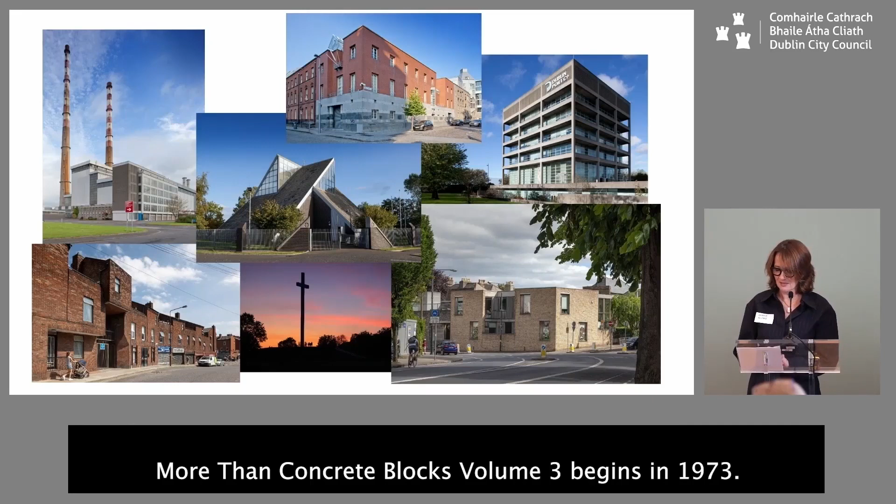More Than Concrete Blocks, Volume 3, begins in 1973. The book starts with three contextual essays, one for each of the decades, the 70s, 80s, and 90s, before setting the scene and allowing the reader to situate themselves in the city and imagine the conditions that gave birth to a wonderful, eclectic, and particularly Irish architecture.

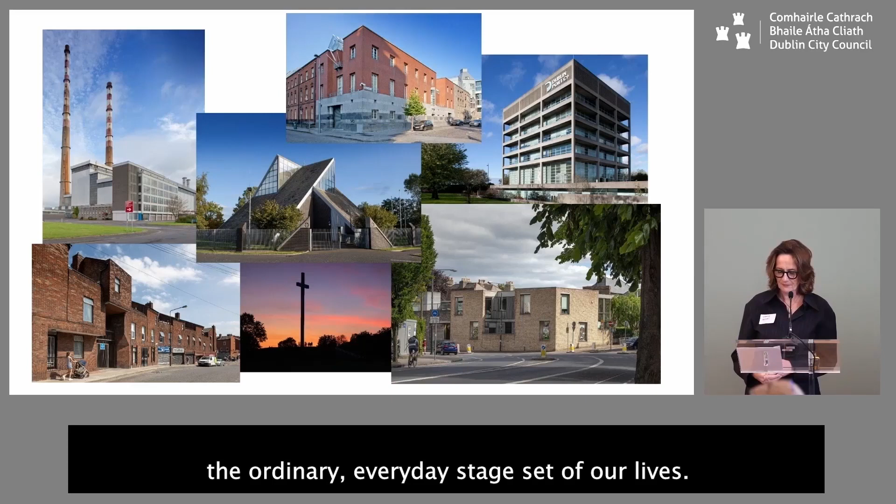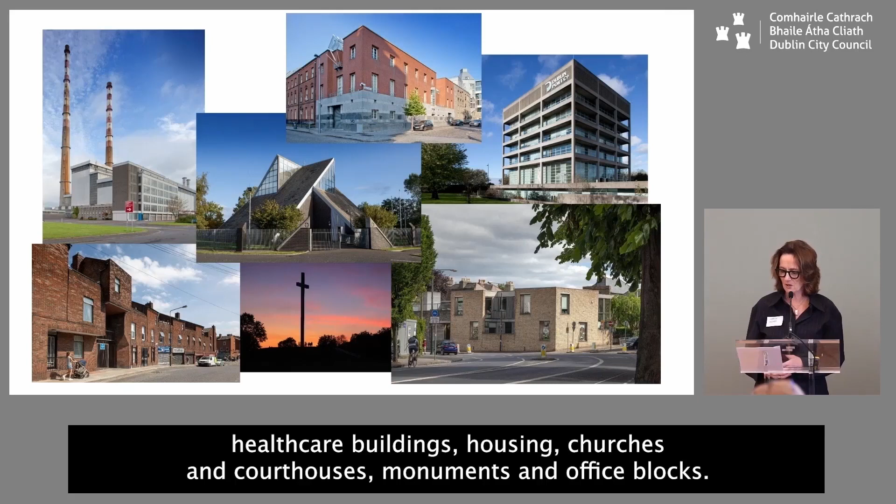That is the bread and butter of our city, the ordinary, everyday stage set of our lives. More Than Concrete Blocks tells the story of myriad building types: power stations, schools, healthcare buildings, housing, churches and courthouses, monuments and office blocks. It tells the story of why those buildings are the way they are, why they were built and by whom.

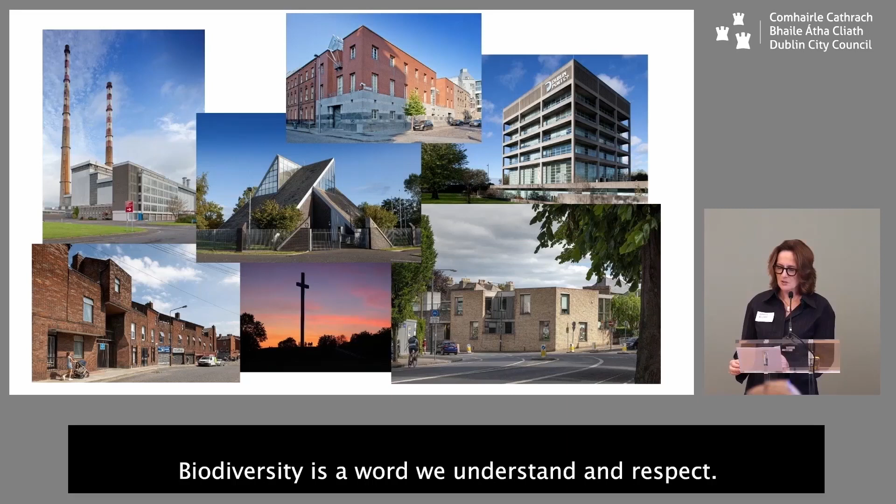And how they have served their owners and their communities in the years since they were built. A fundamental principle behind the More Than Concrete Blocks project was the belief that knowing our building stock well, understanding its intricacies, and valuing it for what it tells us about ourselves is vital for a healthy and thriving city. Biodiversity is a word we understand and respect. We believe that cities need similar diversity, archidiversity, if you will, to remain healthy, vibrant, relevant, and sustainable.

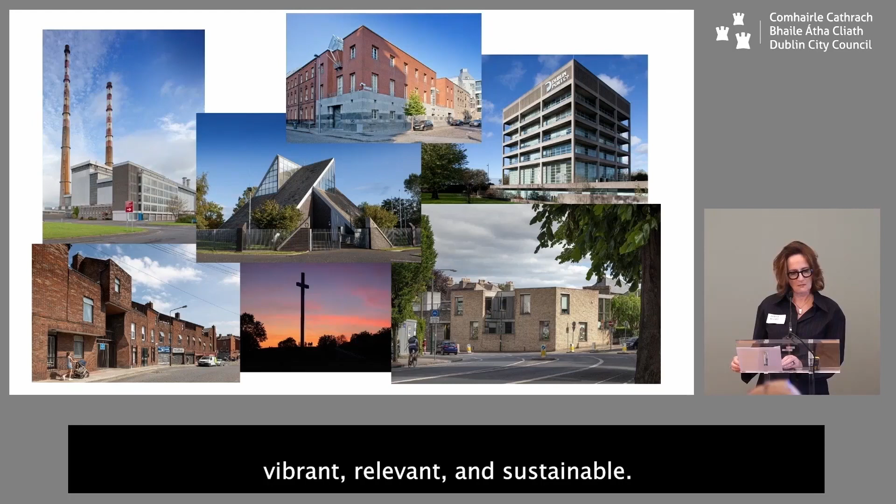We need to pause and consider the loss of our archidiversity, particularly the significant loss of late 20th century office blocks, and imagine how our city can embrace that architecture and take it on the ride into the future.

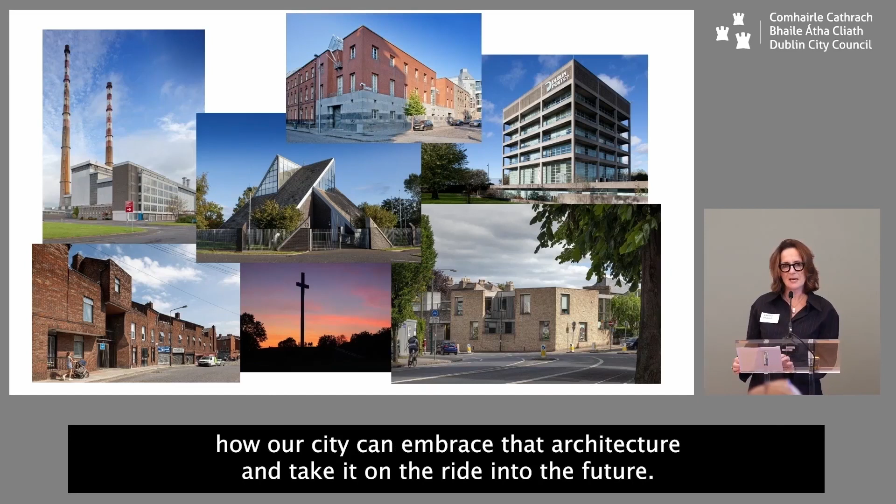In recent times, my regular cycling route has changed profoundly with the loss of three significant 20th century Dublin landmarks: Kevin Street College of Technology, Molyneux House, and River House. Ample evidence of the increasing incidence of loss of this particular 20th century varietal.

Indeed, the 60s and 70s office block is a particularly vulnerable beast, with wholesale demolition occurring across the city. The scale of obliteration is feeding the debate about architectural value. What makes a building worth conserving or worthy of substantial retention by way of adaptive reuse?

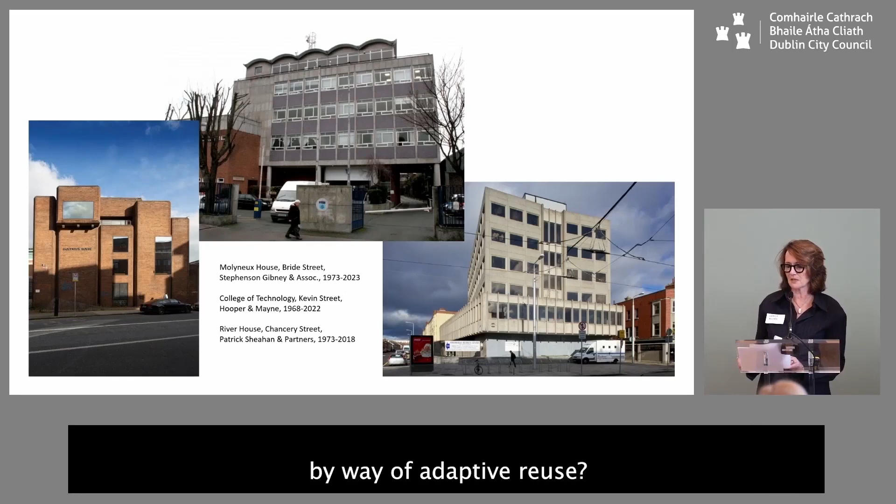Under planning legislation, local authorities are obliged to draw up a record of protected structures known as the RPS, which includes every structure which, in its opinion, is of special architectural, historical, archaeological, artistic, cultural, scientific, social, or technical interest. And I know everybody in this room is very familiar with that.

However, it is very rare to find late 20th century office blocks on the RPS. This factor, combined with the fact that 60s and 70s office blocks usually sit on very valuable city real estate, makes them particularly vulnerable to demolition.

There is no roadmap for the assessment of their value, and in any case, such assessment, if it is deemed necessary, falls to independent heritage specialists who earn their fees from the developers whose primary objective, of course, is to derive maximum value from the building site. It makes sense then that the sites of the 70s office blocks are primary targets for redevelopment.

Nevertheless, there are a few 1970s office buildings listed on the RPS, the former Bank of Ireland headquarters on Baggot Street, now known as Miesian Plaza, being one. Its recent refurbishment by its original architect, Scott Tallon Walker, is an obvious exemplar to boost the position of planning authorities regarding refusing permission to demolish in favour of refurbishment.

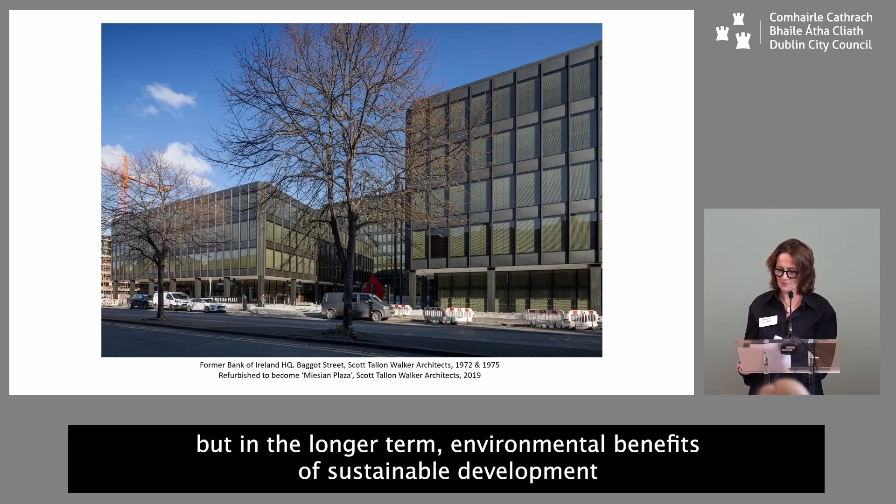The successful, albeit costly, refurbishment at Baggot Street can show the way for developers to see the value in such upgrades. Gains must be measured not just in terms of financial return, but in the longer-term environmental benefits of sustainable development and, of course, the preservation of our archidiversity.

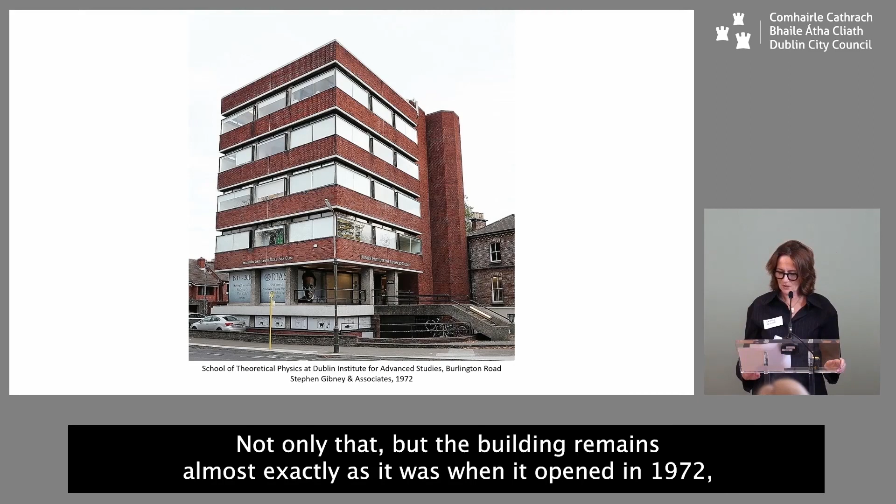Another lesser-known office building on the RPS is the School of Theoretical Physics at the Dublin Institute for Advanced Studies on Burlington Road, designed by Stephen Gibney and Associates. Despite many lucrative offers from developers to purchase the site, the DIAS, who is the owner-occupier, has held firm. Not only that, but the building remains almost exactly as it was when it opened in 1972, complete with original furniture, library shelves, light fittings, and the most precious fixtures of all, the blackboards.

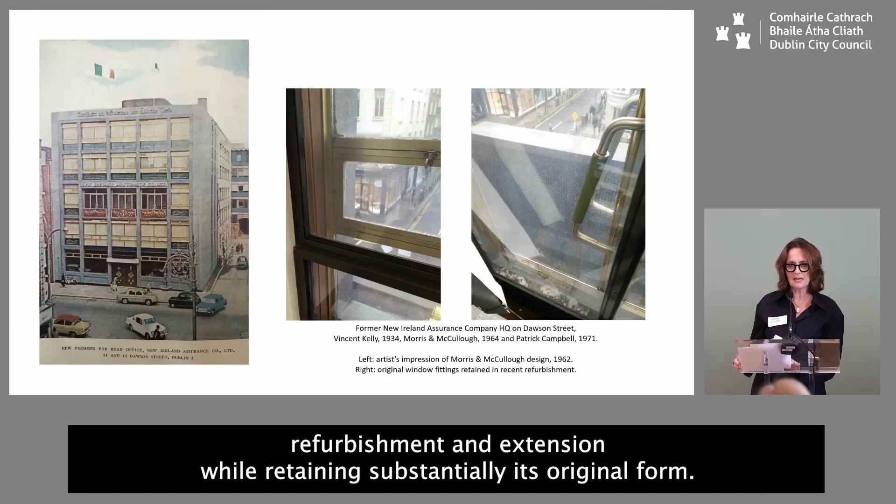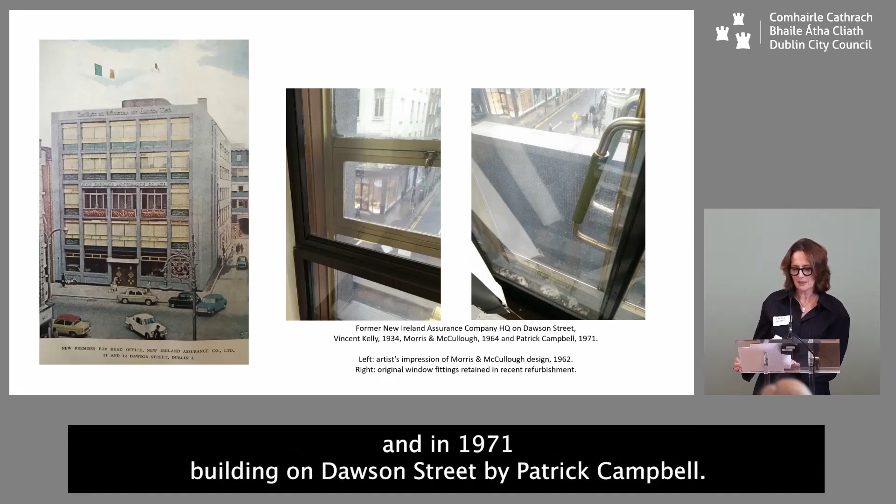The former New Ireland Assurance Company offices on Dawson Street is another example of an office building on the RPS, which is currently undergoing refurbishment and extension while retaining substantially its original form. The building is in fact an amalgam of three buildings: a 1934 office building on Dawson Lane by Vincent Kelly, a 1964 office building on the corner of Dawson Street and Dawson Lane by Morris and McCullough, and a 1971 building on Dawson Street by Patrick Campbell.

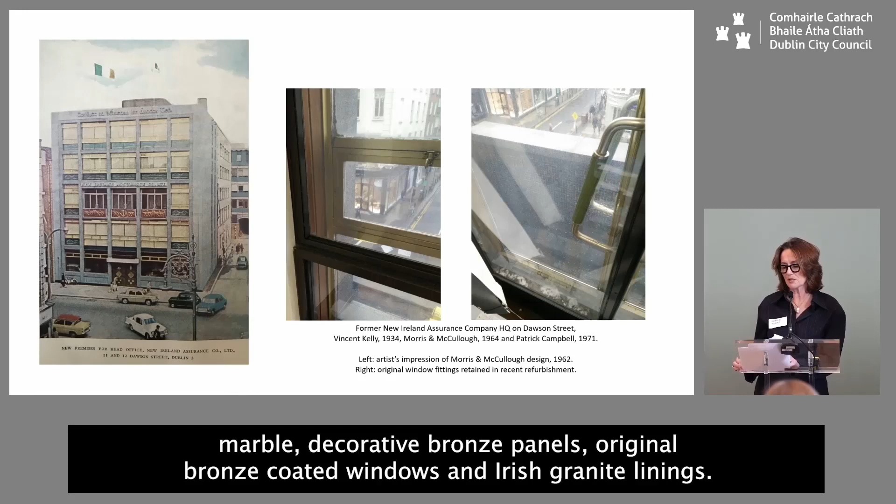The current refurbishment works, which are nearing completion, include the retention of the concrete structure and facades, and the original curtain walling system on the '71 building. They also include many of the building's unique and important details, including Connemara marble, decorative bronze panels, original bronze-coated windows, and Irish granite linings. Planners granted permission for additional floors set back behind the parapet, showing compromise can reap benefits for all.

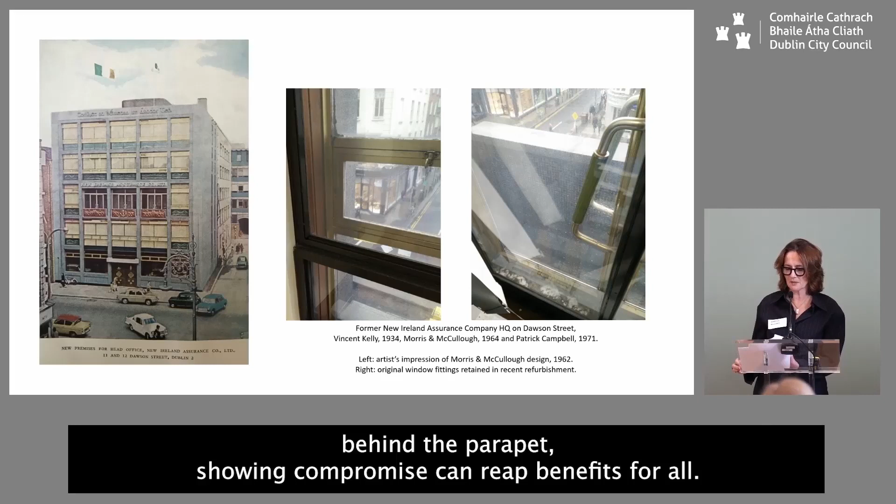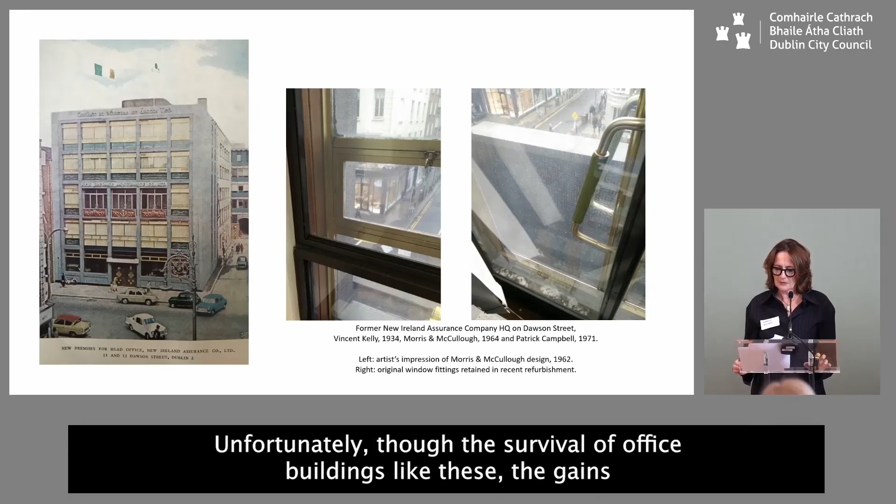In the context of the pervasive threat to Dublin's 1970s office blocks, these three projects represent gains, each in a different way. Unfortunately, though, the survival of office buildings like these, the gains, are greatly outnumbered by the losses.

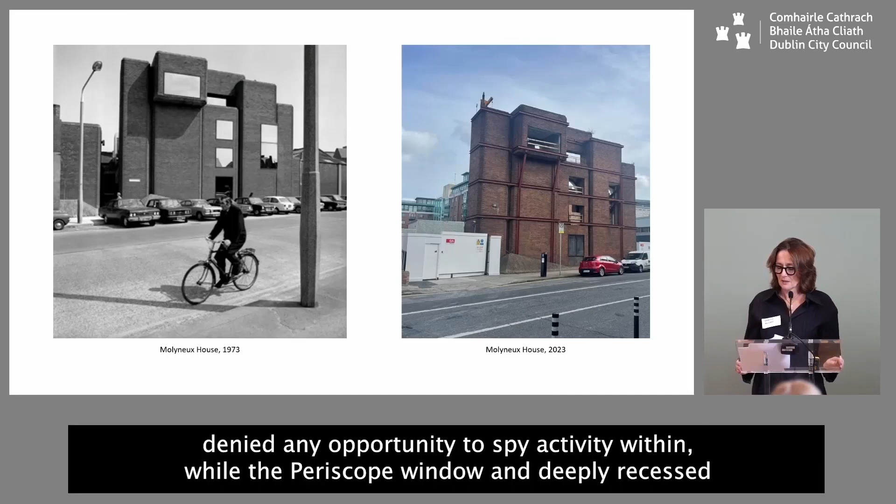Until earlier this year, the facade of Molyneux House remained one of the most distinctive in the city. The building's unusual fortress-like form was both perturbing and intriguing. Reflective glass in the windows, now gone, denied any opportunity to spy activity within, while the periscope window and deeply recessed balcony on the fourth floor suggested covert surveillance of the street below.

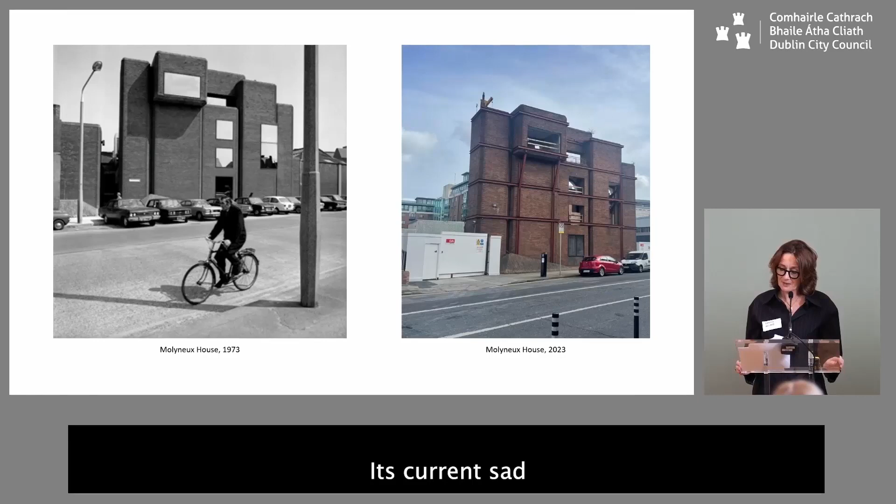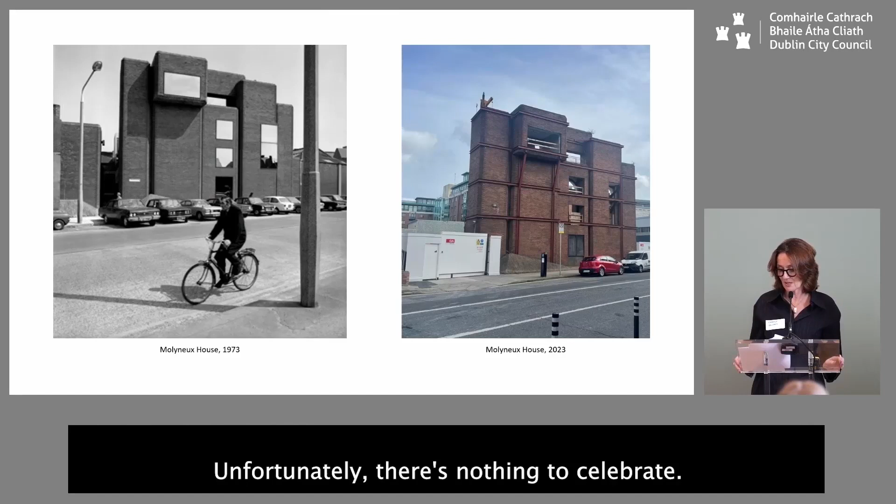In its current sad state, it is all the more distressing for the fact that Molyneux House is celebrating its 50th birthday this year. Unfortunately, there's nothing to celebrate. All that remains is the skeletal outer layer of its remarkable facade.

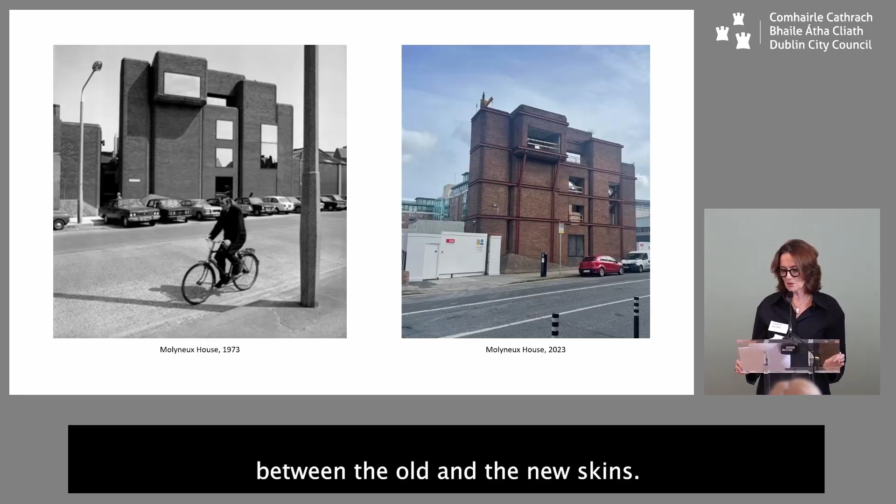In designing that facade, Stephenson purposely retained the front wall of the original 19th century Molyneux Chapel, constructing an outer layer that broke forward from the old in an irregular manner, so that a series of uniquely different spaces was created between the old and the new skins. By retaining the outer brick layer only, now in 2023, Stephenson's ingenious gesture is completely lost. A tragic irony, considering he was one of the most vociferous opponents of facadism in the 1970s and 80s.

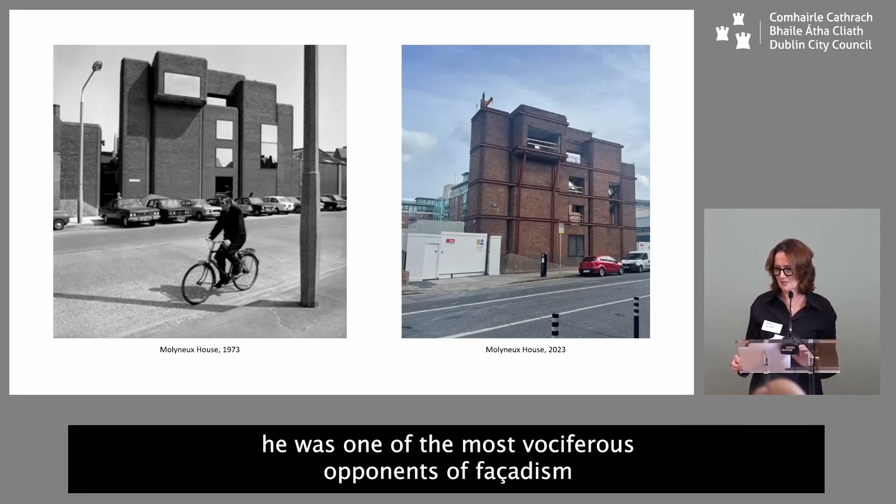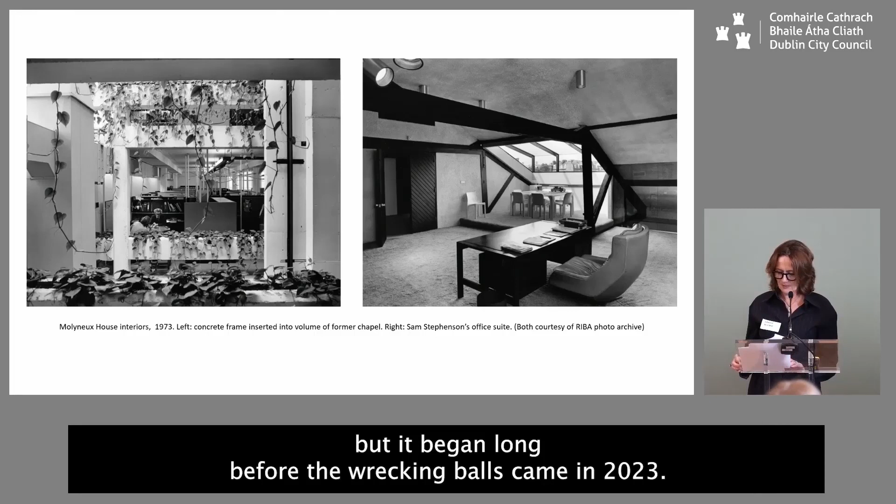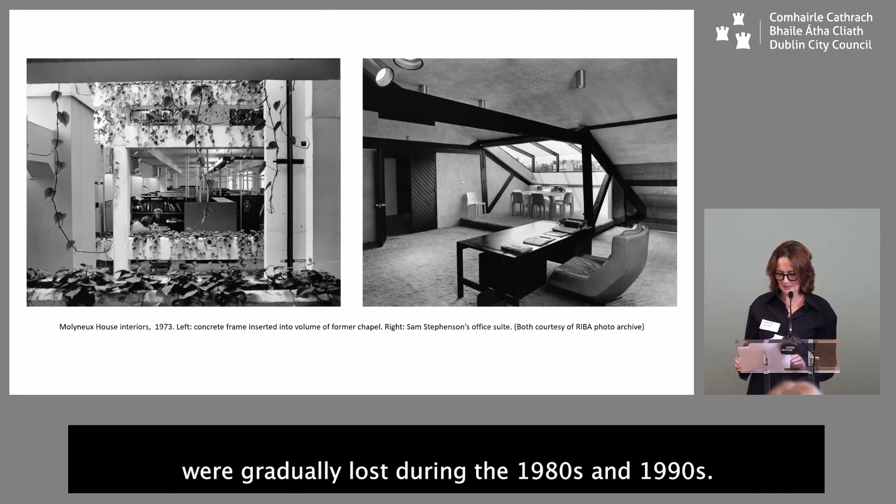What has been lost at Molyneux House is significant and regrettable, but it began long before the wrecking balls came in 2023. Stephenson's avant-garde 1970s interiors, a gleaming white concrete frame inserted into the volume of the former church, with open-plan offices, a glass lift, an open staircase, trailing plants, and his own bespoke suite on the upper floor, were gradually lost during the 1980s and 1990s. When a building is not on the record of protected structures, its interiors are particularly vulnerable to loss.

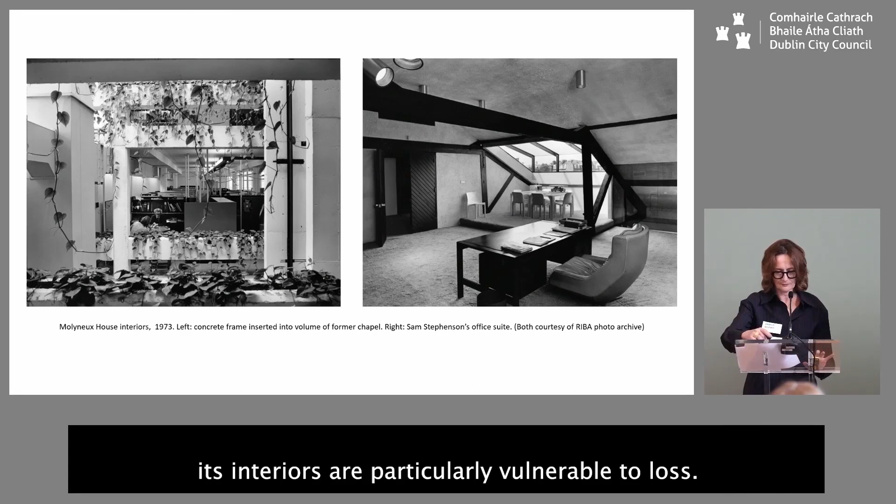AIB Bank Centre in Ballsbridge was not on the record of protected structures when permission to demolish the complex was granted in 2017. Bank Centre was designed and built as Ireland's first corporate campus, an American typology that became increasingly popular in Europe in the 1960s. The original scheme, designed by Andy Devane, comprised 15 pavilions arranged in a symmetrical composition, 9 of which were built.

In 2018, when demolition began, the pavilions were in excellent condition, internally and externally. They were nevertheless perceived by their developer to be redundant, worthless artifacts of an earlier age, and because there was no official measurement of value, there was nothing the planning authorities could do to prevent redevelopment.

Devane's masterpiece, and I do not think it's an overstatement to call it that, was demolished and replaced with a new scheme called Fibonacci Square. The scheme's developers chose the name because, they alleged, the renowned architect Andy Devane, designer of the AIB campus, was inspired by the Fibonacci sequence, as was his mentor, Frank Lloyd Wright.

Having studied Devane's work for a number of years now, including his time under the tutelage of Frank Lloyd Wright, I have never come across a reference to Fibonacci in their work. A strange and obscure gesture in the circumstances.

Devane, one of the century's most prolific architects, designed only 3 office schemes in Dublin: AIB Bank Centre, the Irish Life Centre, and Stephen Court. Efforts to get Stephen Court listed on the record of protected structures were not successful. And just last month, an appeal to An Bord Pleanála was withdrawn, paving the way for its imminent demolition.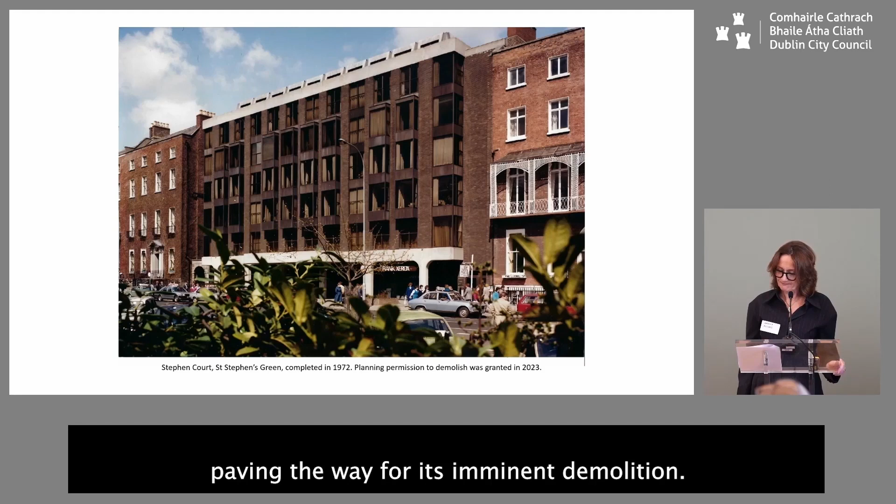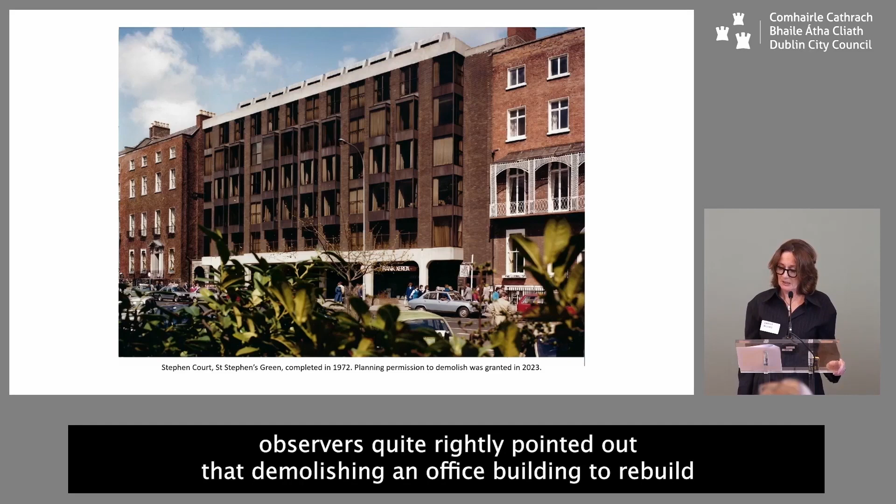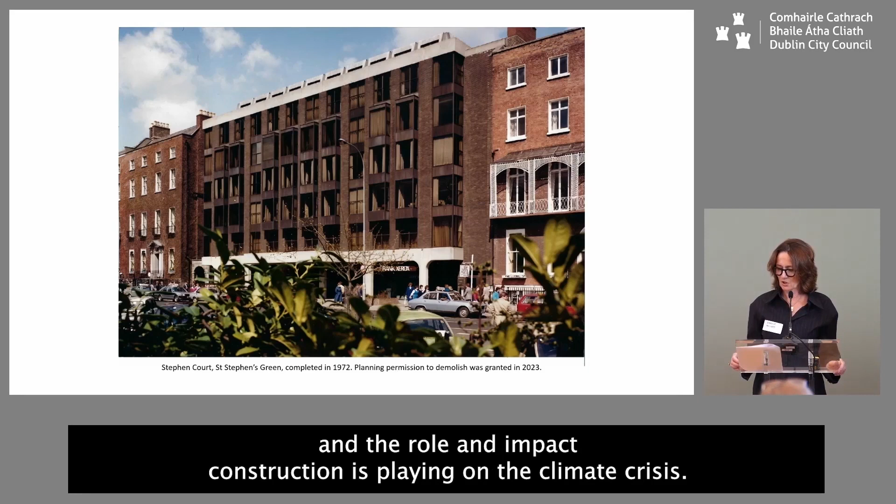In the many submissions to the Planning Authority arguing against the demolition of Stephen Court, observers quite rightly pointed out that demolishing an office building to rebuild an office building was an outrageous proposal in 2022, given the climate emergency and the role and impact construction is playing on the climate crisis. This argument needs to gain more momentum.

In the meantime, the only thing that may put a stay on the demolition of Stephen Court, long enough for its demolition to be reconsidered at least, is the fact that Dublin currently has an excess availability of office space.

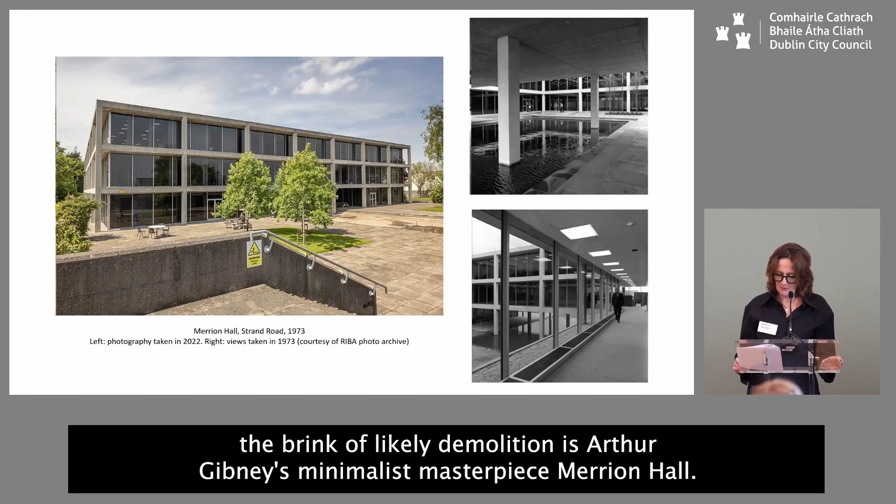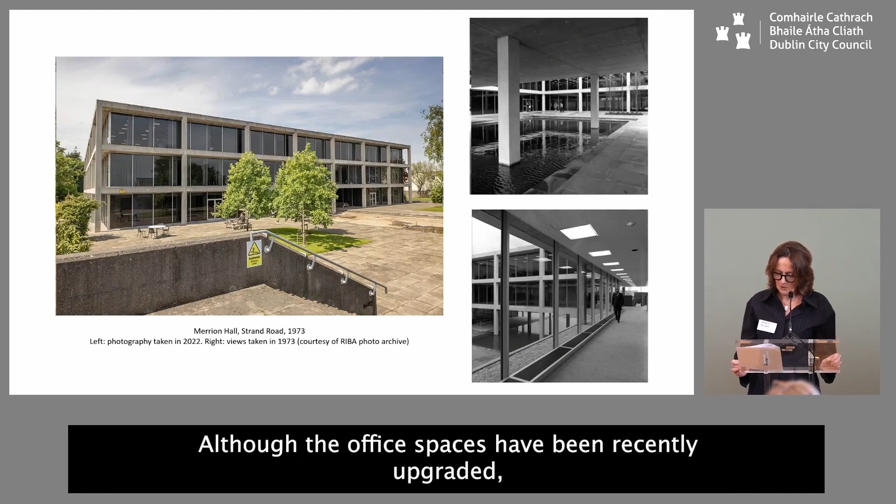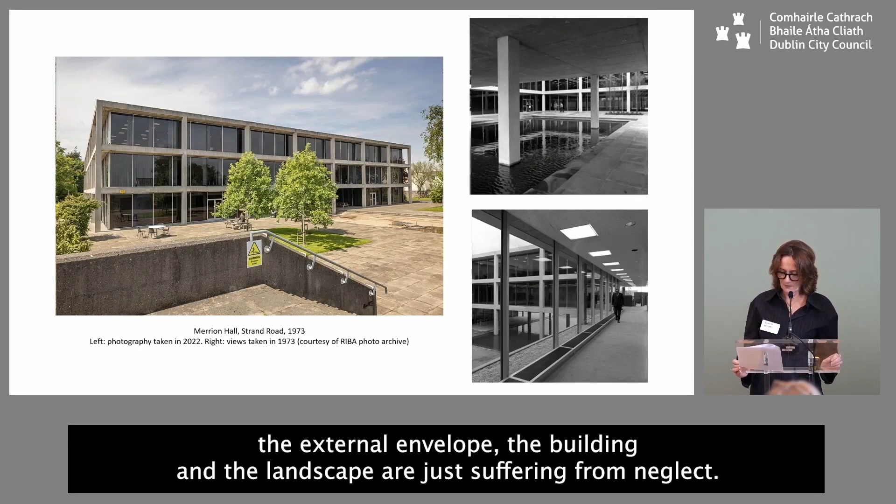It is now owned by a property investment company and let on a long lease to its current tenants. Although the office spaces have been recently upgraded, the concrete frame is showing signs of stress—fully repairable stress, I add—and generally the external envelope of the building and its landscape are suffering from neglect. The reflecting pool is empty, there are cracks and poorly executed repairs in the concrete paving, and the lawns are unkempt.

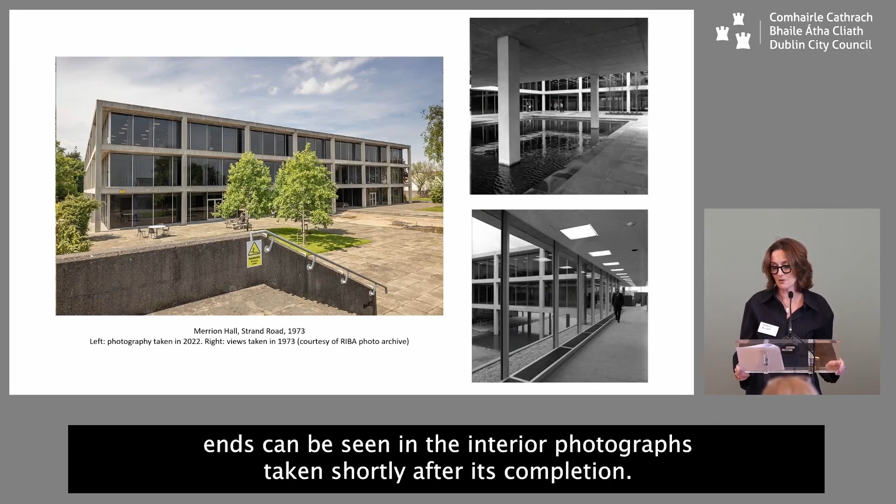Merrion Hall deserves better. The proportions of the office spaces are conducive to modern office demands, as can be seen in the interior photographs taken shortly after its completion. It is one of the most enduring Irish office blocks of its age.

The demise of 60s and 70s office blocks started when the Irish economy began to pick up in the 2010s, when there was renewed demand for new generation office buildings. In 2017, the Bord Fáilte headquarters on Baggot Street Bridge, designed by Robin Walker and completed in 1963, was demolished. The site lay vacant, surrounded by hoarding, until earlier this year.

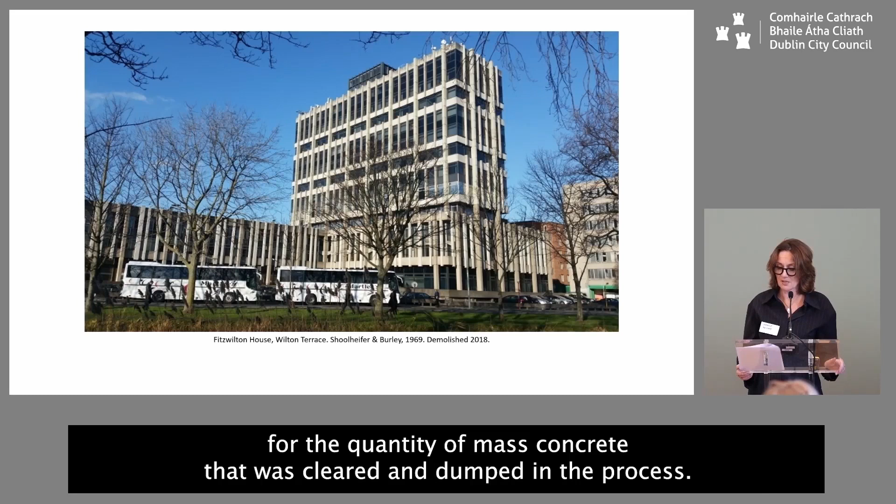In 2018, on nearby Wilton Terrace, one of Dublin's most identifiable 20th century office blocks, Fitzwilton House by Shoolheifer and Burley, was demolished. I do not have a figure for the quantity of mass concrete that was cleared and dumped in the process. Calculations for carbon release are not a requirement of the planning permission process.

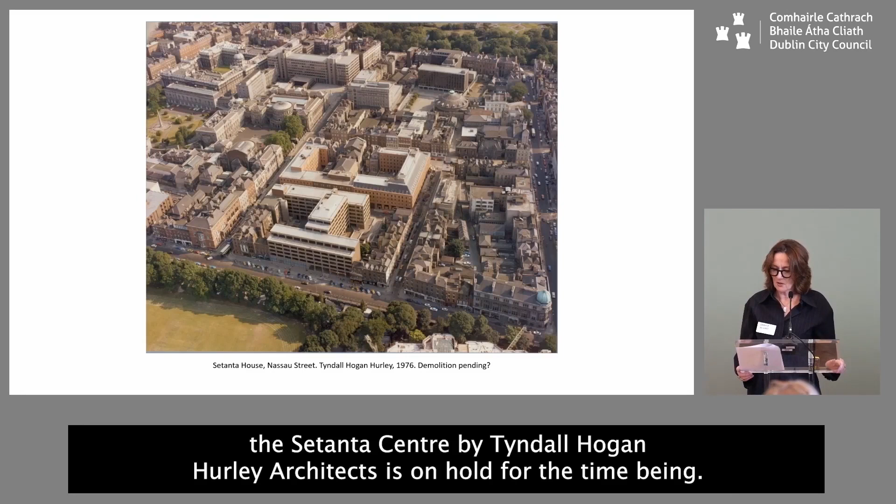Demolition of the Setanta Centre by Tyndall Hogan Hurley Architects is on hold for the time being. The decision not to proceed is not based on architectural or environmental considerations, but is the result of a legal dispute between the developer and existing tenants.

This photograph clearly shows the proximity of the Setanta Centre to Molesworth Street, a street that has seen more demolitions than any other in the city in recent times, and that phenomenon has spread into neighbouring Dawson Street and Nassau Street.

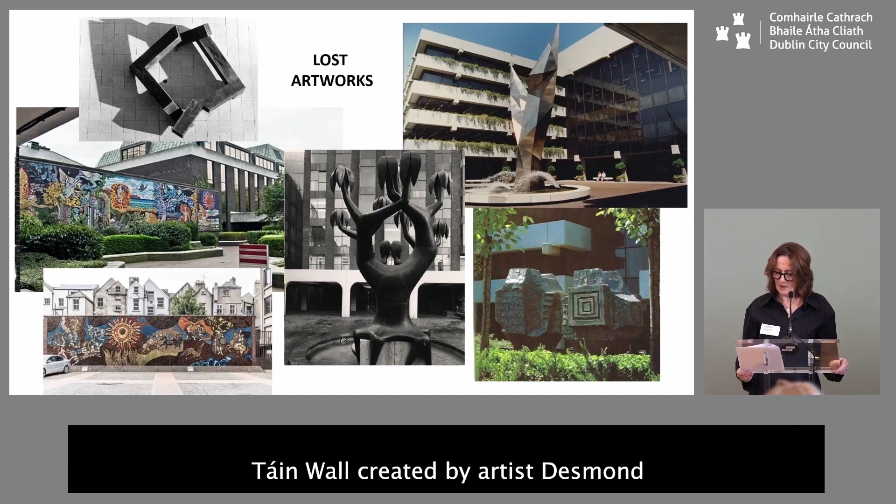While the fate of Setanta House is being decided, the famous 1970 Táin Wall, created by artist Desmond Kinney, was taken down. It is hopefully stored safely somewhere for future reinstatement. You can see it there on the bottom left.

The same cannot be guaranteed for Kinney's other great 1987 mural, known as Sweeney's Astray, shown middle left. According to one source, the mural was ripped off the wall of the Abbey Court Garden in the Irish Life Centre and packed into black plastic bags.

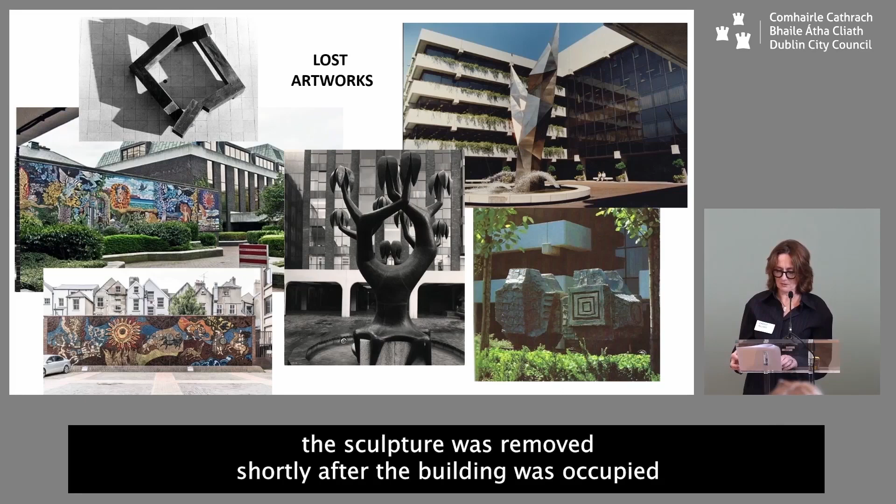Top left is an image of Michael Warren's timber sculpture, Noce Obscura, commissioned by architect Neil Scott for the Port and Docks headquarters on Alexander Road. Intended to be viewed from the office floors above, as it is in this photograph, the sculpture was removed shortly after the building was occupied, and its whereabouts are unknown.

In the centre is a photograph of Ian Stewart's Tree of Life, cast in copper, which stood in the internal courtyard of Stephen Court. It was one of a pair of Stewart sculptures commissioned by Devan. The other, the Tree of Knowledge, was cast in concrete. Both were removed in the 1980s, and their whereabouts are unknown.

At bottom right is a photograph of John Behan's stone carvings known as Metholithic Moments, which stood in the landscape gardens at AIB Bank Centre. The whereabouts of this artwork and others commissioned by Devan for AIB, including work by Desmond Kinney, Alexandra Wejchert and Anne Price Owens, are unknown.

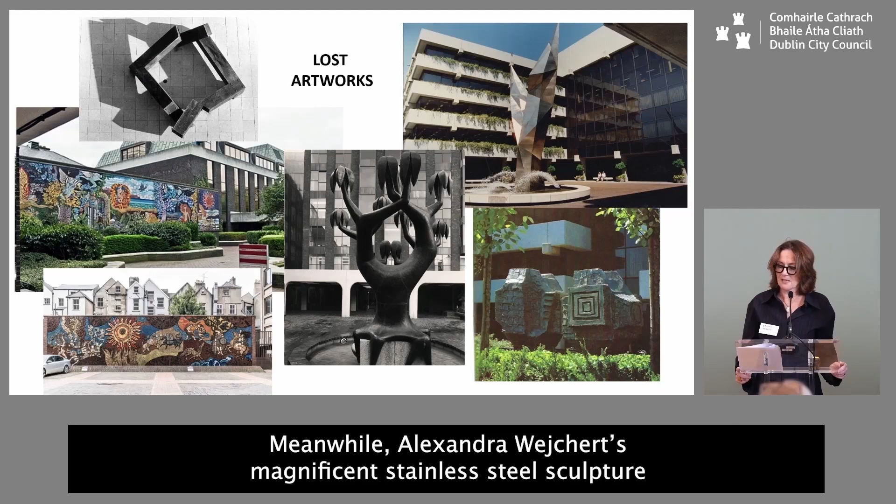Meanwhile, Alexandra Wejchert's magnificent stainless steel sculpture Freedom, shown on top right, was removed when Bank Centre was demolished and has been relocated to Maynooth University, I believe.

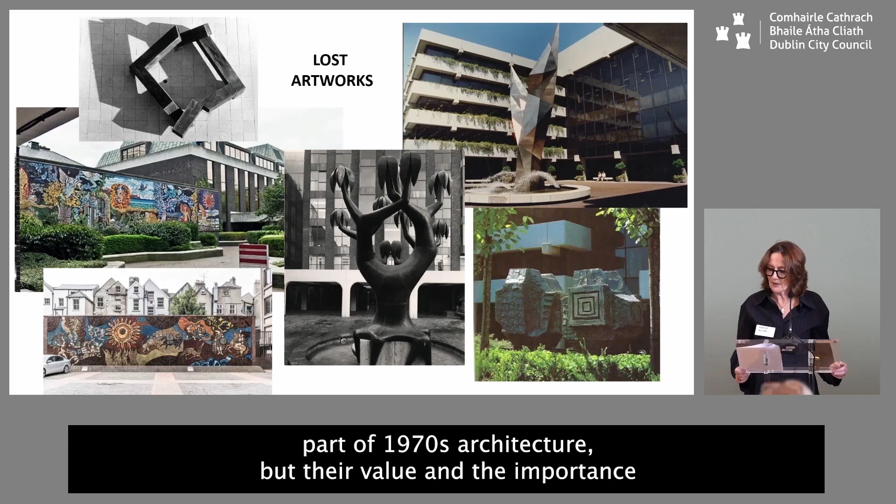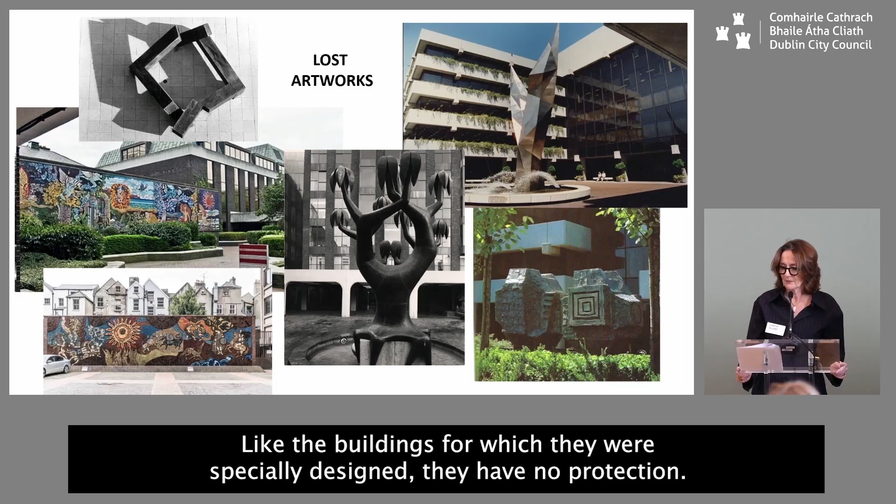Artworks were very much an integral part of 1970s architecture, but their value and the importance of their contribution to that architecture is not recognised. Like the buildings for which they were specially designed, they have no protection. Their vulnerability is exacerbated by the fact that the removal is not considered demolition and therefore does not require planning permission.

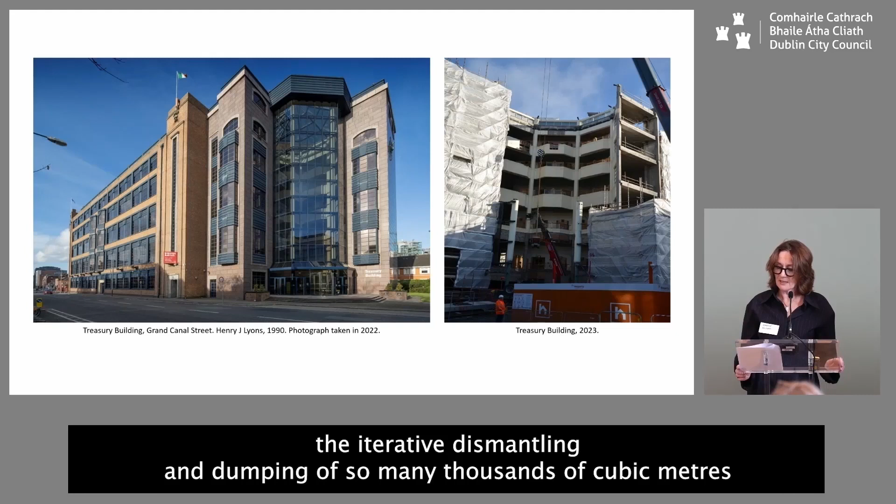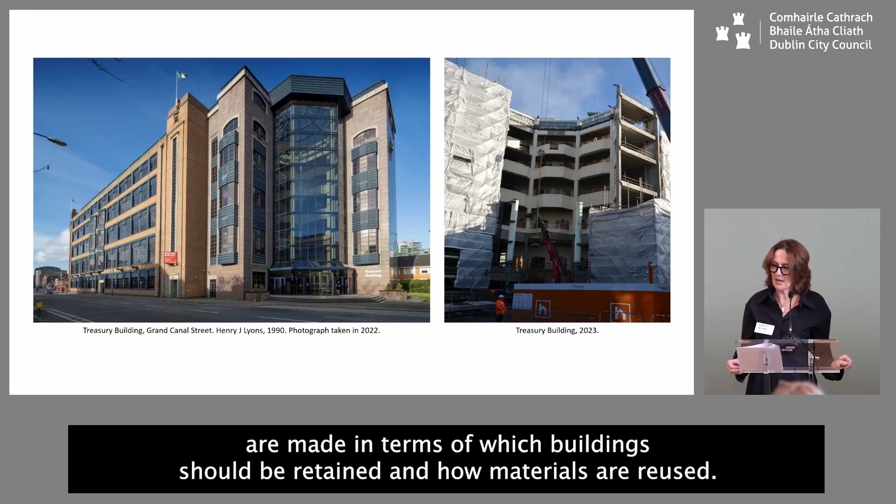Demolitions are continuing elsewhere in the city too, and while few will lament the loss of Hawkins House and others in that particular city block, the iterative dismantling and dumping of so many thousands of cubic metres of viable building materials must call into question how value assessments are made in terms of which buildings should be retained and how materials are reused. In the past few weeks, six stories of Italian and Norwegian marble, along with vast expanses of custom-made Belgian window systems, have been stripped off Treasury buildings on Grand Canal Street.

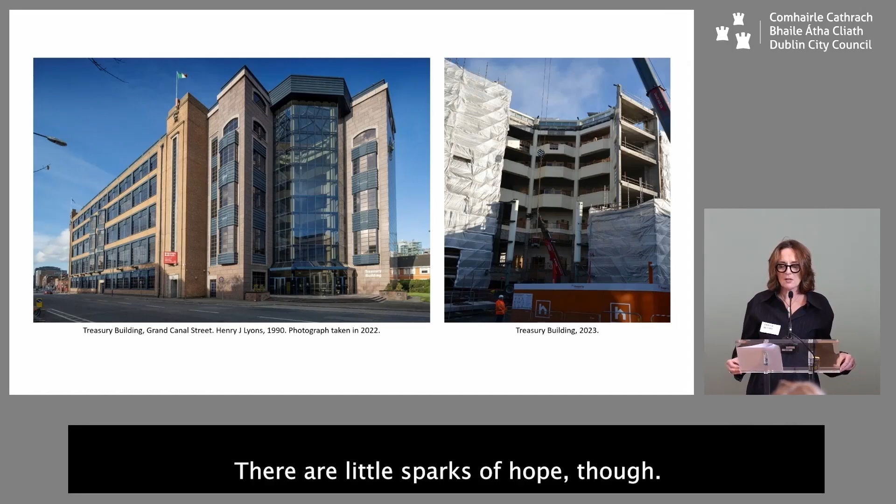There are little sparks of hope, though. Engineer John Casey has been instrumental in harvesting the stripped-out materials and in repurposing materials such as steelwork from the atrium in new parts of the building. Concrete that has been removed is being repurposed as aggregate for roads.

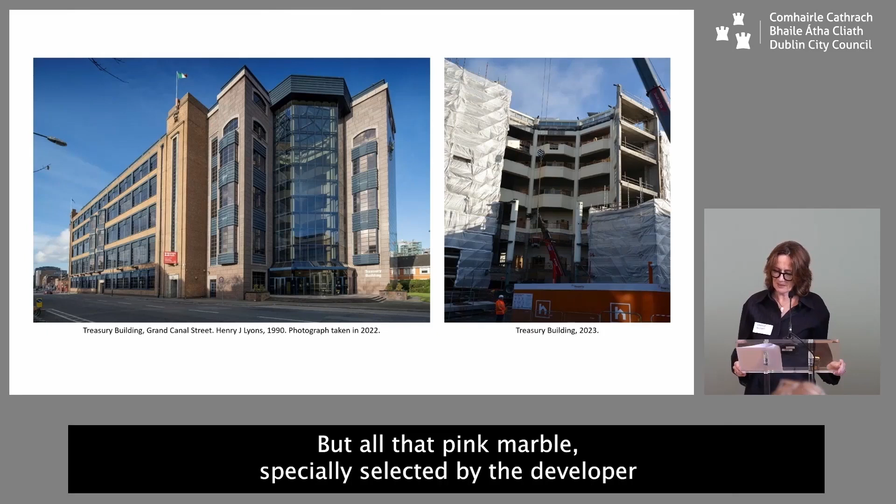But all that pink marble, specially selected by the developer in the 1980s, is available free to anyone who would like to take it away. If you are interested, you can check out the Irish Green Building Council website.

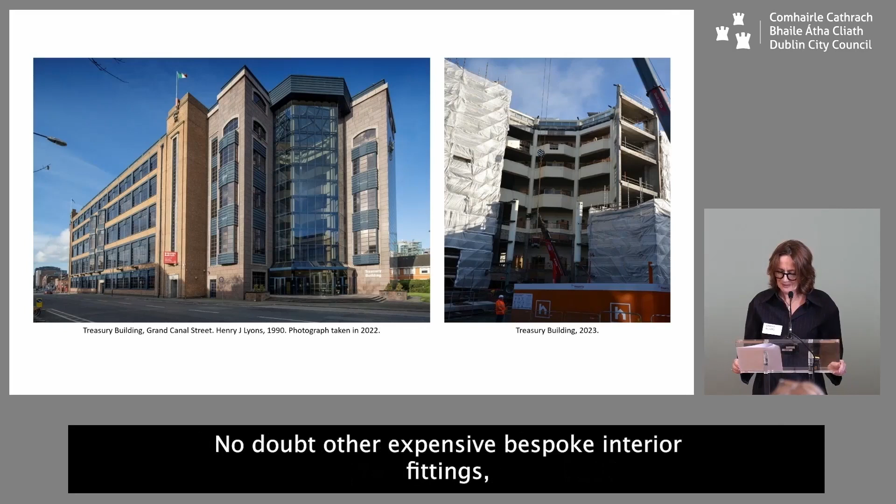No doubt other expensive bespoke interior fittings, including brass ironmongery and porcelain bathroom fittings imported from the United States, have been relegated to the dumpster.

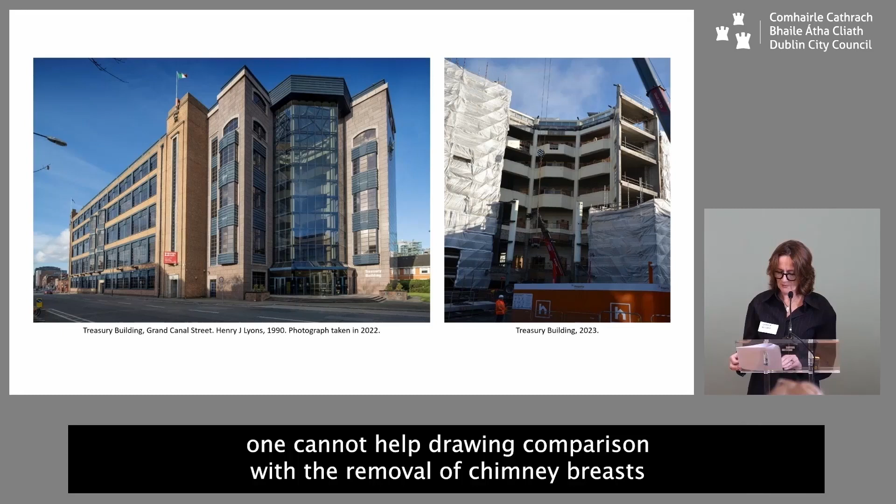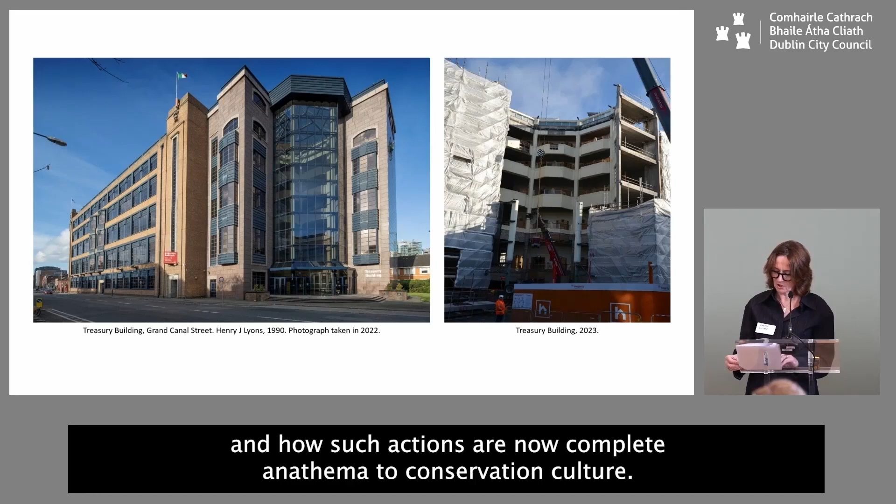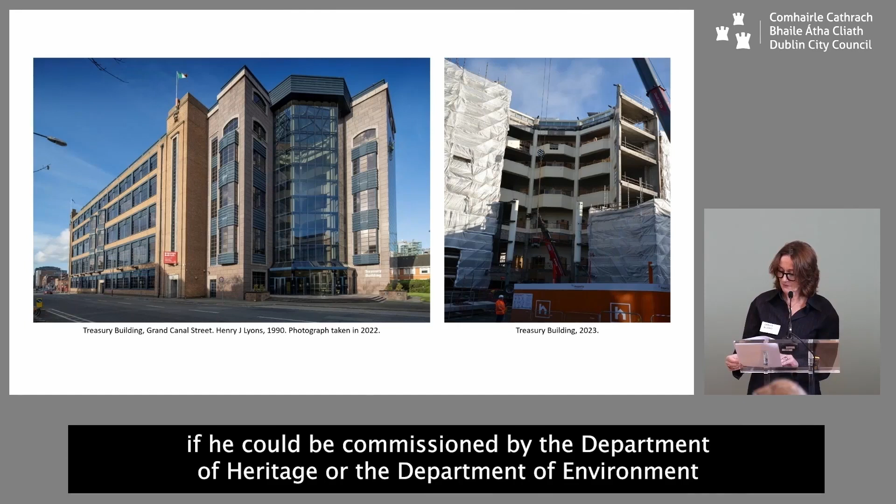And remember, this building was only completed in 1990. While efforts to recycle and reuse materials from the Treasury building are admirable, one cannot help drawing comparison with the removal of chimney breasts and stripping of roof slates from historic buildings, actions now complete anathema to conservation culture. The groundbreaking work of John Casey and his team is important nonetheless, and it would be great if he could be commissioned by the Department of Heritage or the Department of Environment to report on the outcome of his efforts at Treasury Building.

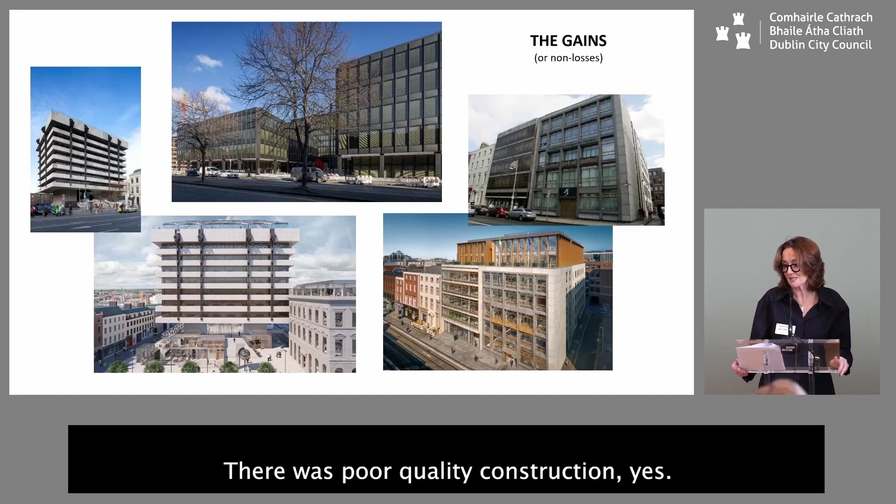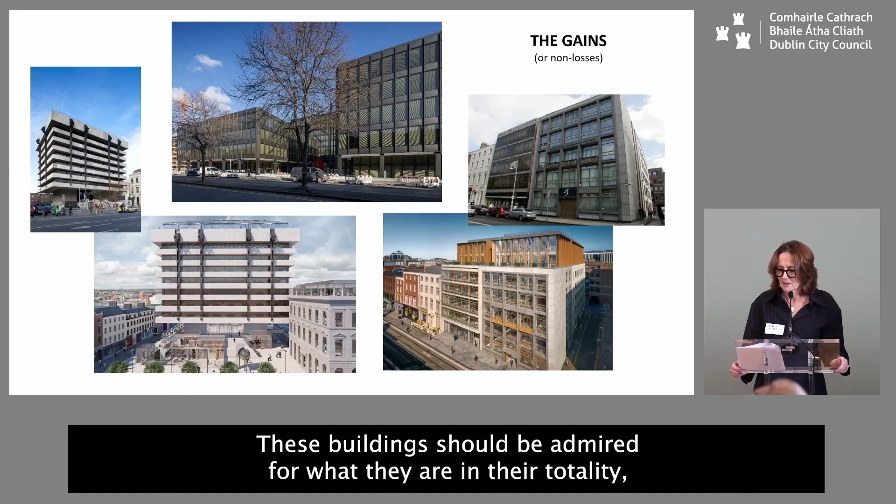1970s office buildings are troublesome, yes. There was inappropriate development, yes. There was poor quality construction, yes. But there was also hope, determination, and ambition in bucket loads. The decades of the 1960s and 1970s epitomise Ireland's concerted effort to declare itself an independent state. These buildings should be admired for what they are in their totality, not simply dismissed as irrelevant artefacts.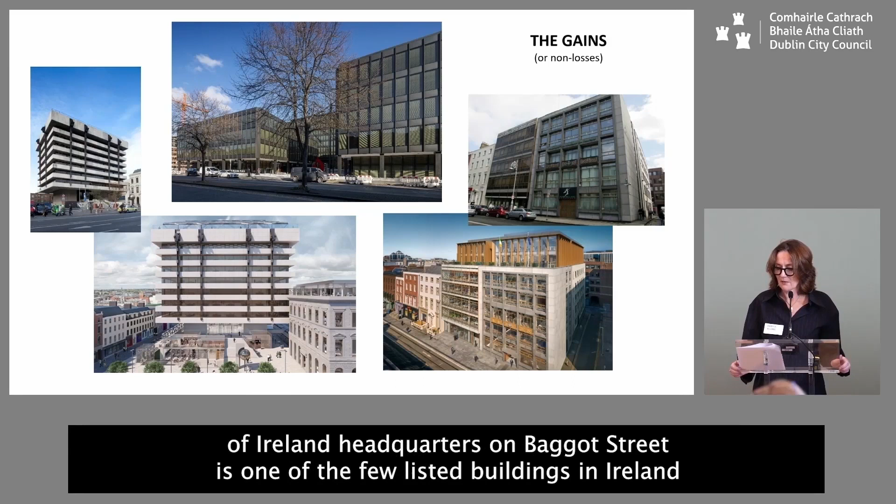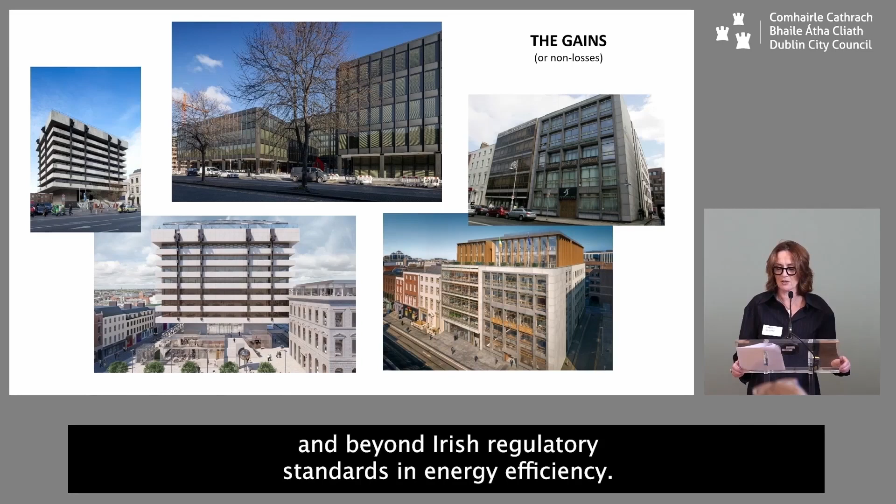The refurbished former Bank of Ireland headquarters on Baggot Street is one of the few listed buildings in Ireland to achieve Leadership in Energy and Environmental Design, LEED. LEED is a rating system devised by the United States Green Building Council. It measures the environmental performance and sustainability of buildings and goes above and beyond Irish regulatory standards in energy efficiency. I look forward to Ronan Phelan's presentation this afternoon.

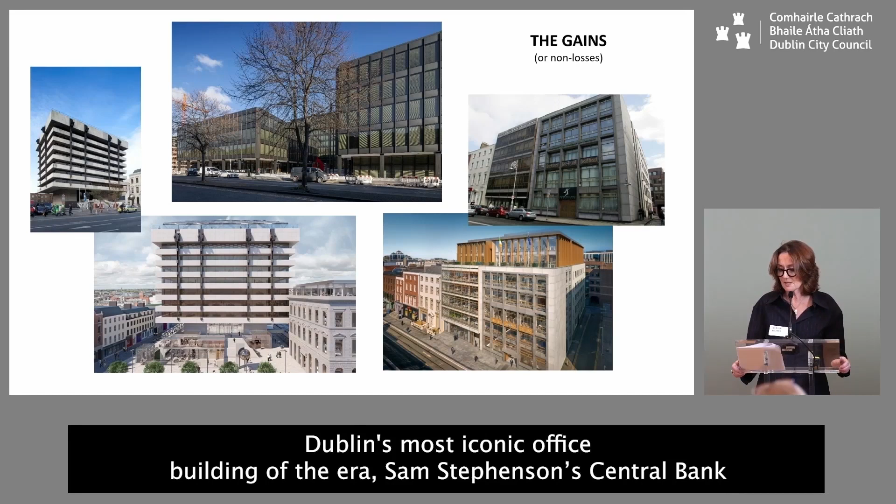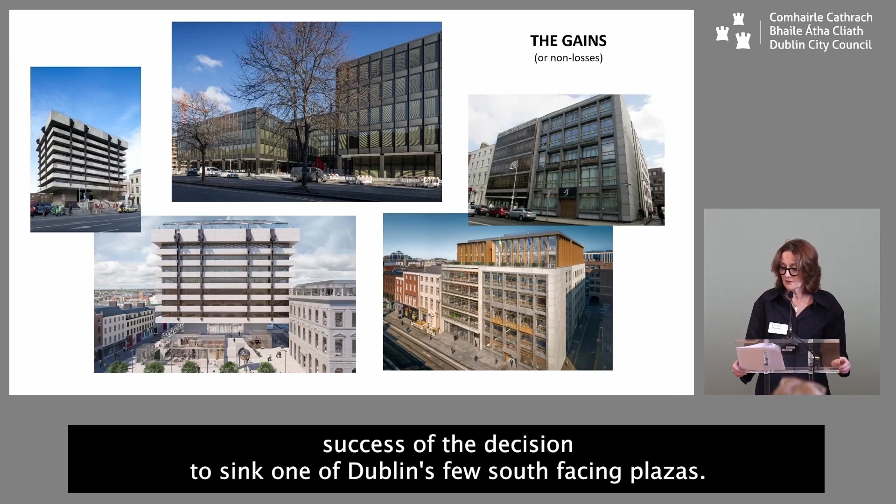Dublin's most iconic office building of the era, Sam Stephenson's Central Bank, reimagined as Central Plaza. However, I think there are some doubts as to the long-term success of the decision to sink one of Dublin's few south-facing plazas. As yet, no tenants have occupied the Louvre-inspired glass rooftop bar and restaurant, but we are hopeful that the developers will hold the promise of making the building, particularly that roof space, accessible to the general public. Brendan Ward will tell us more later today.

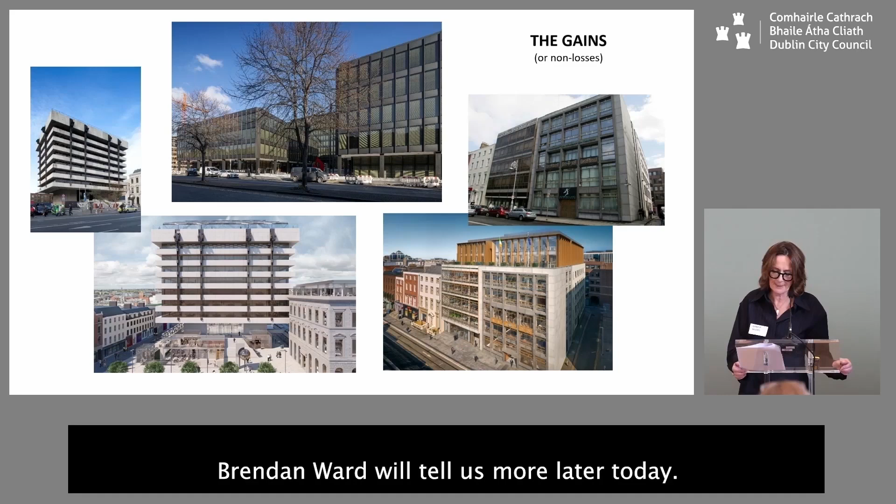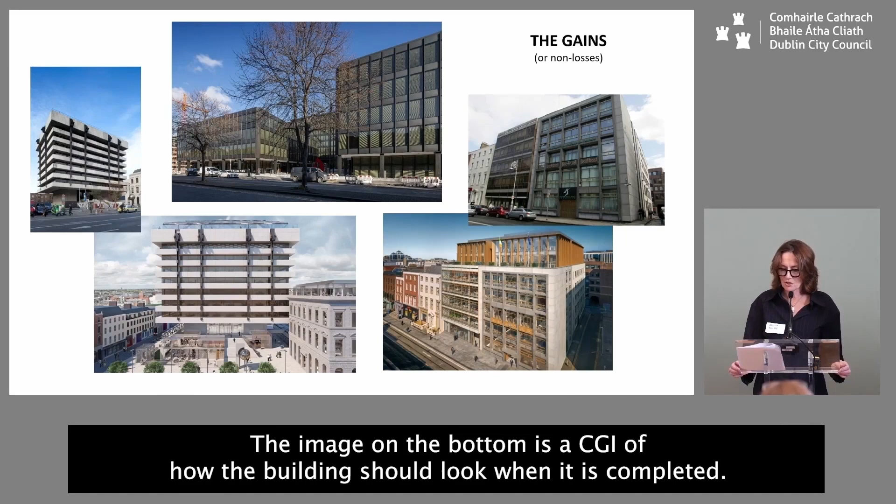The success of the refurbishment of the former New Ireland Assurance Company headquarters is still to be revealed. The image on the bottom is a CGI of how the building should look when it is completed. Pascal Mahoney will talk about this afternoon also.

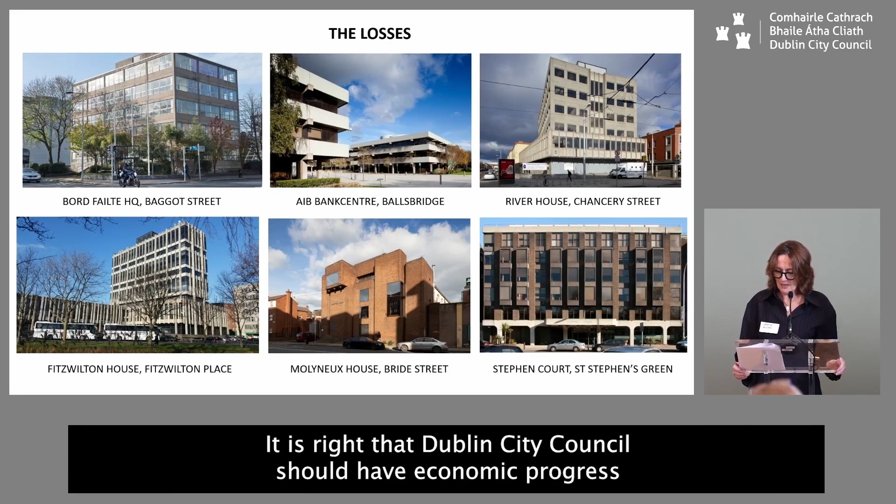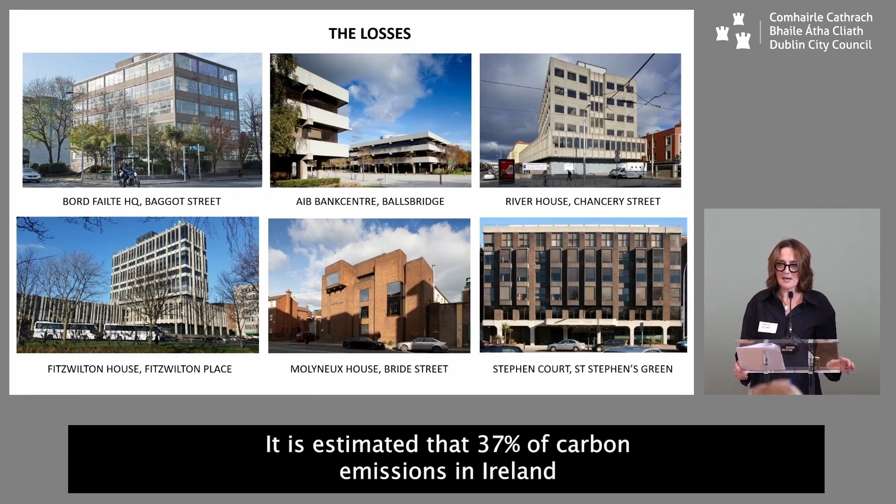The solutions for 20th century office buildings are not simple. The greatest hindrance to survivability is the inadequacy of the value system, the assessment system as it is currently applied. It is right that Dublin City Council should have economic progress and prosperity for all citizens at the heart of its decision-making processes, but economics cannot be placed ahead of sustainability. It is estimated that 37% of carbon emissions in Ireland stem from the construction and built environment sector.

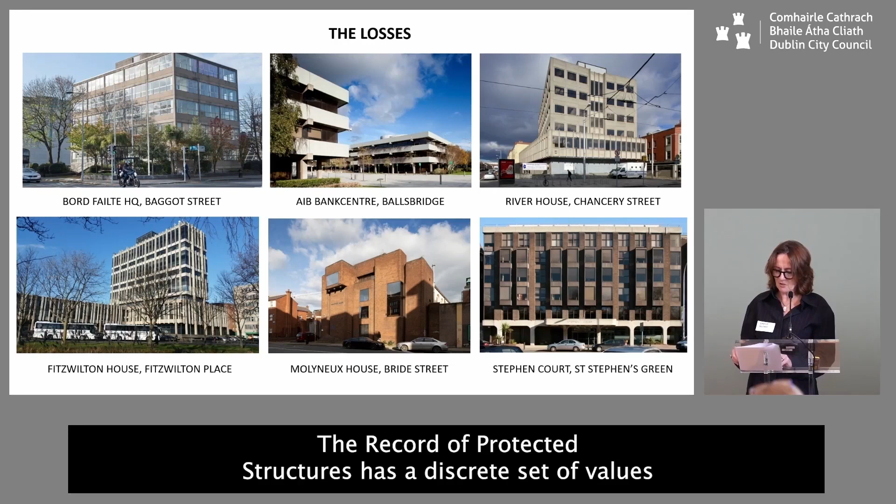The record of protected structures has a discrete set of values by which buildings are assessed for value, and then protections are applied and enforced. Should a similar set of values, protections and enforcements be made when a planning application is received to demolish a viable building? What are the criteria to be met when it comes to measuring environmental value that is so inextricably linked with cultural value? How can the loss of an architectural landmark be valued?

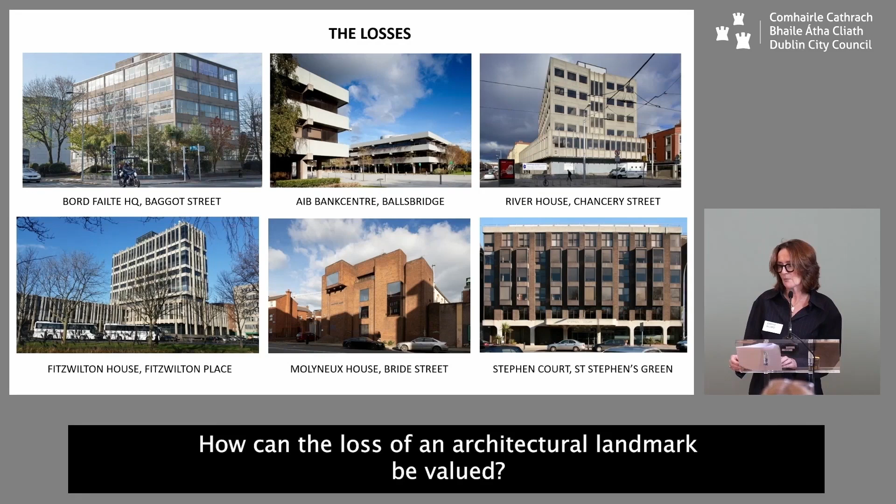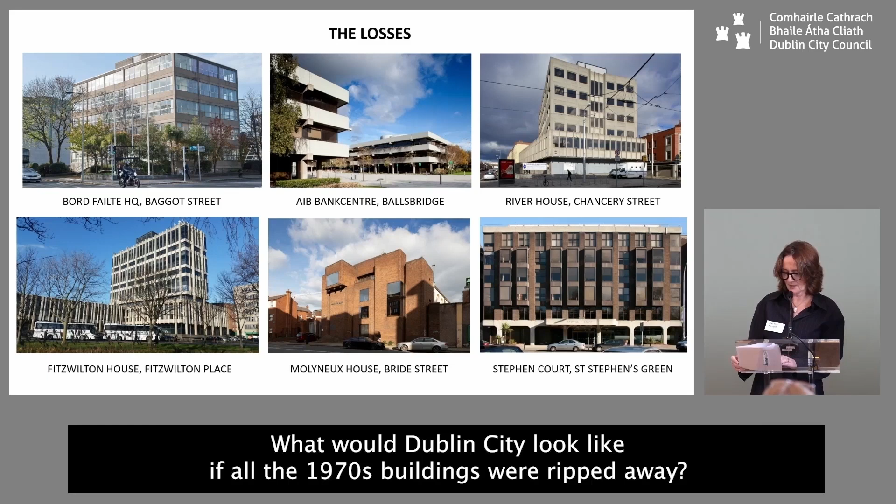What is the place of 20th century office buildings in our national psyche, now and in the future? What would Dublin City look like if all the 1970s buildings were ripped away? And what would future generations have to say about such an architectural chasm?

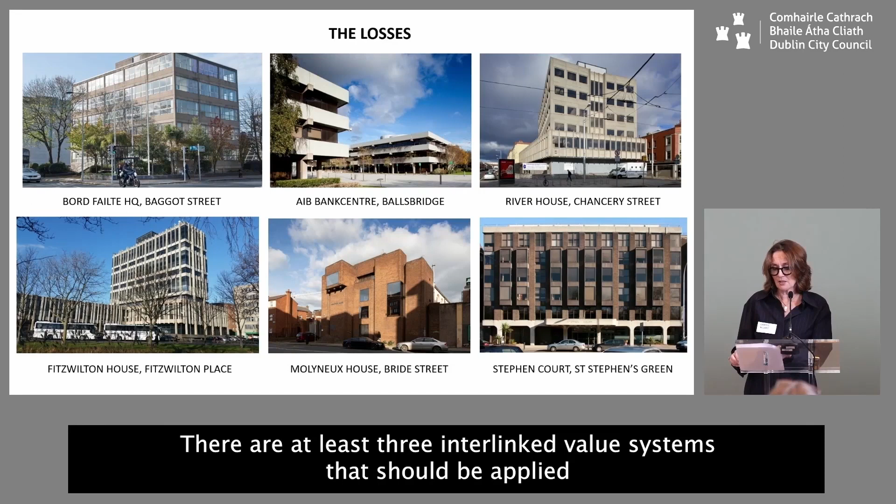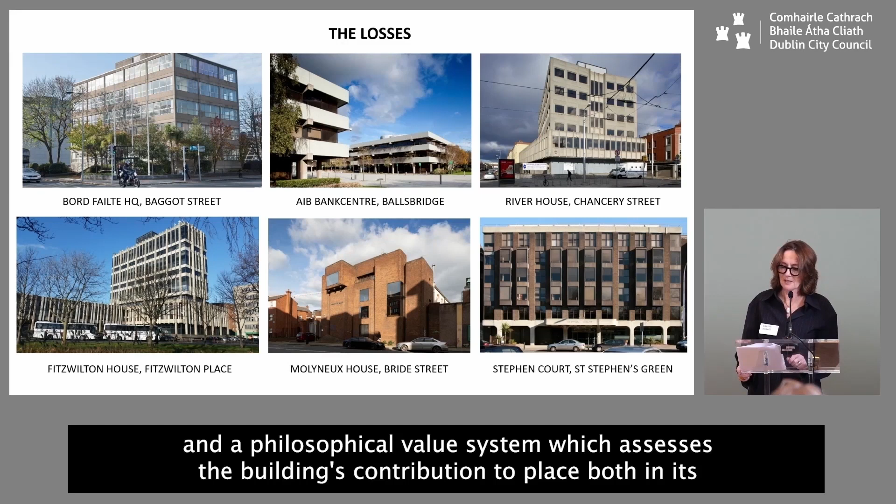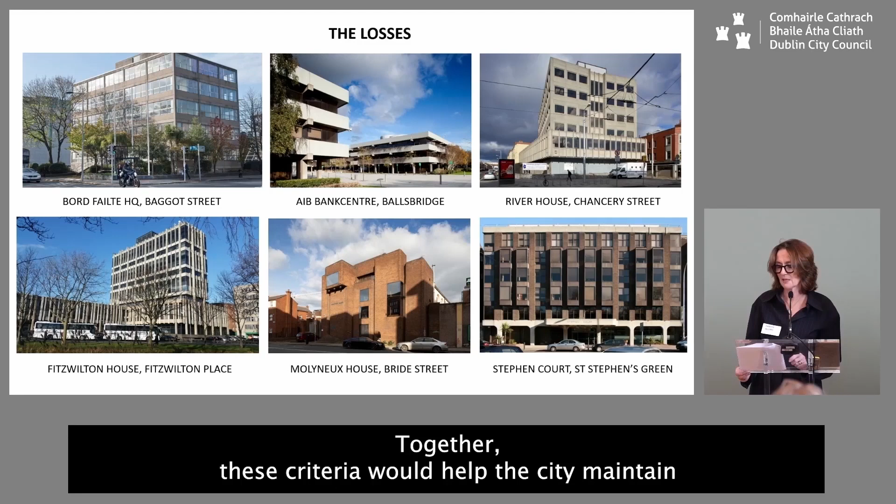There are at least 3 interlinked value systems that should be applied to making decisions about the future of existing late 20th century building stock: an RPS-type value system which measures architectural and technical attributes, a sustainability value system which considers environmental impact, and a philosophical value system which assesses the building's contribution to place, both in its immediate physical context and in the context of its contribution to the city's evolution. Together, these criteria would help the city maintain and sustain a healthy archidiversity.

Only last month, journalist David McWilliams described Dublin's office market as having 3 categories: the Georgian Victorian era, which is an incredible 187 years long, the crony era between the 1960s and 1990s, and the globalization era from 2000 onwards. McWilliams' populist assertion that the so-called crony era offices were built by men in mohair suits and were largely the result of sweetheart deals between politically connected developers and their friends in government denies the much, much deeper and richer legacy of these buildings, their architects, and all those that made them.

We have to look beyond commentary like this. I believe that we are now at an adequate distance to cast a critical and knowledgeable eye over the architecture of the closing decades of the century, particularly the vulnerable buildings of the 60s and 70s. They say 50 is a dangerous age for a building, and the evidence is all around us.

Let's pause and consider the legacy of these buildings in terms of their value to Dublin's future. Let's recognise them for what they really are: a collection of complex organisms that sustain the city and its citizens, a precious and vulnerable element of Dublin's archidiversity. We do not want more than concrete blocks to become a book of obituaries. Thank you.